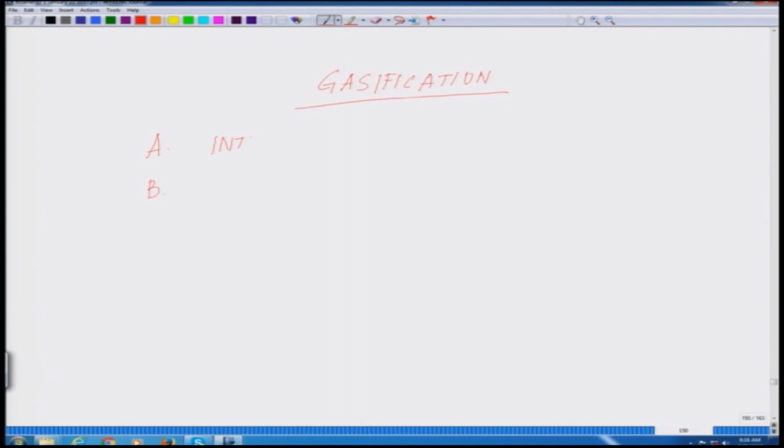First we will introduce what is meant by gasification, the whole process. Then we will talk about the basic chemistry. It is very essential that we understand the chemistry first. Without understanding the chemistry, nothing will make sense, that's why it is different from combustion and other processes like pyrolysis.

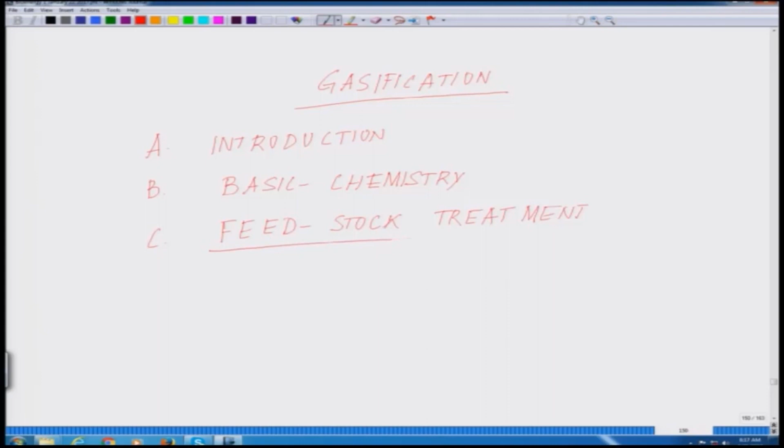Then comes feedstock treatment. This will take you back to the earlier lectures where we talked about what kind of treatments have to be done, what are the properties of the feedstock. Before you put something in a gasifier, or the whole assembly in which you are converting biomass to gas, you need to do some form of pre-processing of that biomass, or the feedstock - basically a biomass pre-treatment or biomass treatment, whichever we call it.

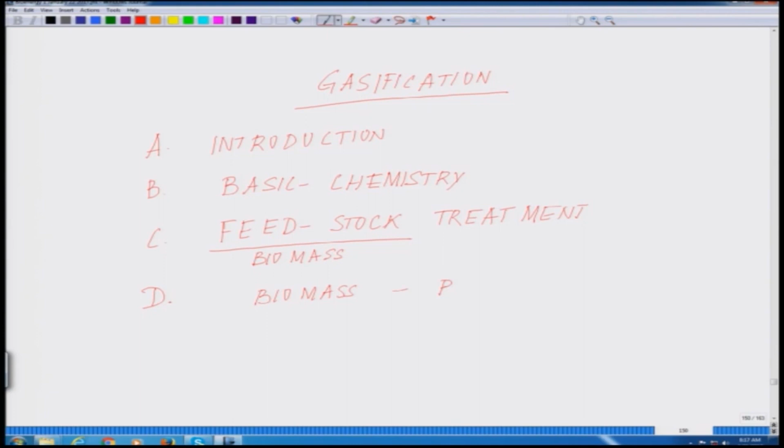Next, we will talk about gasification types, the different methods by which gasification is done. Under gasification types, the basic aspects of the chemistry will be the same, but different designs of gasifiers and everything will be discussed. Then, in conclusion, after these 5 aspects, we will do a summary of the whole thing we have covered. So this is the blueprint or the part of the notes we will be following today.

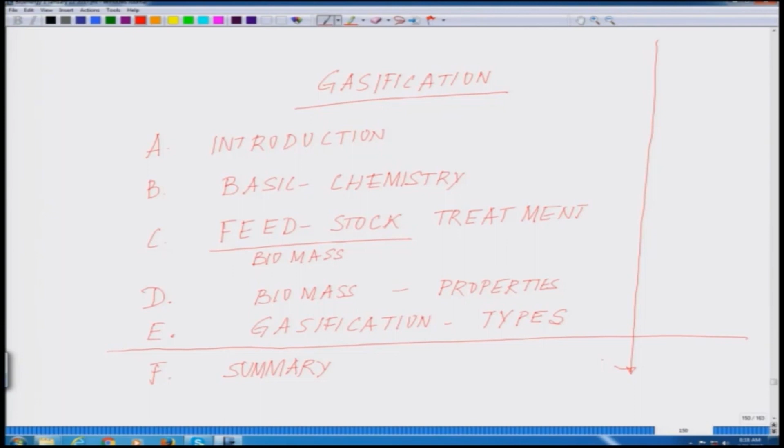So now talking about the introduction - what is gasification by definition? Gasification is a process of conversion of biomass into a combustible gas mixture. We will talk about what that gas mixture consists of. This is the basic process.

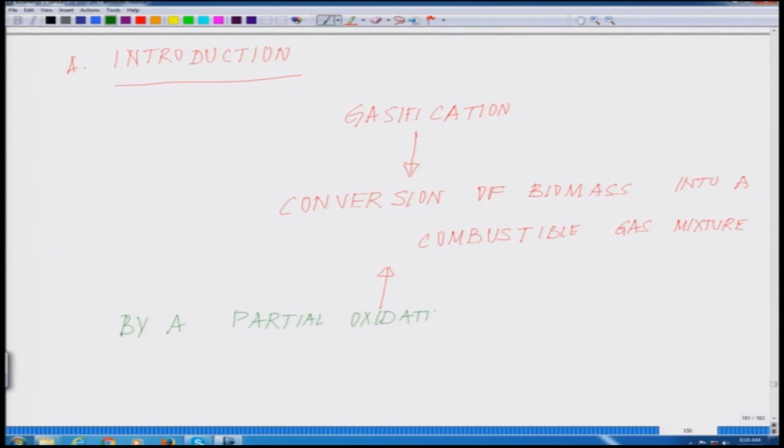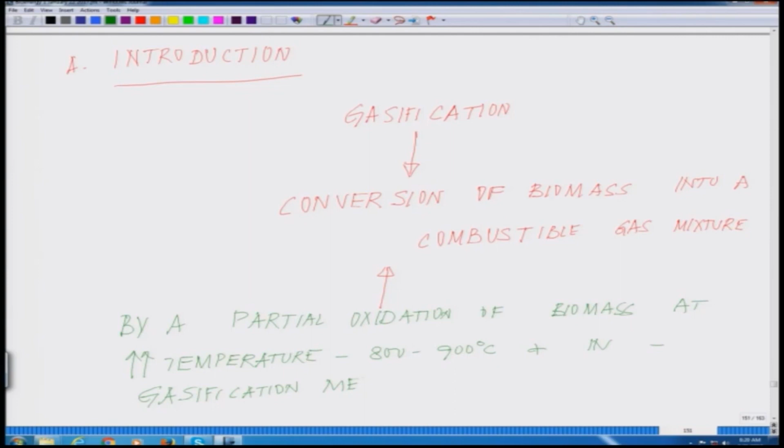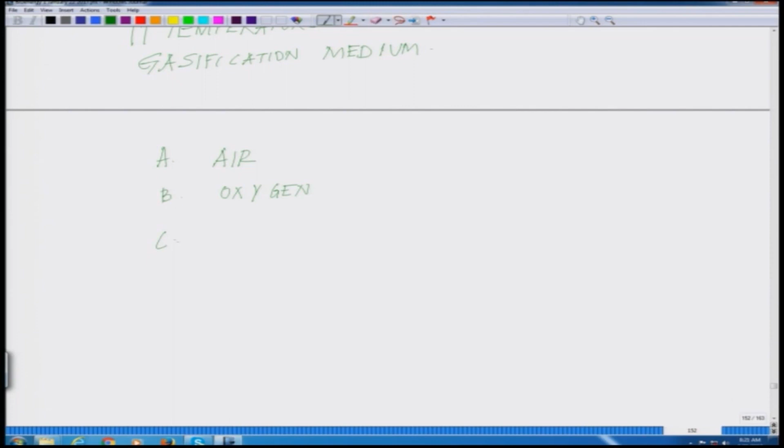How do we do so? The process which is followed is by partial oxidation of biomass at very high temperature, which is around 800 to 900 degrees centigrade, approximately, and in a gasification medium. What is the gasification medium? The gasification medium consists of either air, oxygen, steam, and there are a few more which we will talk about later.

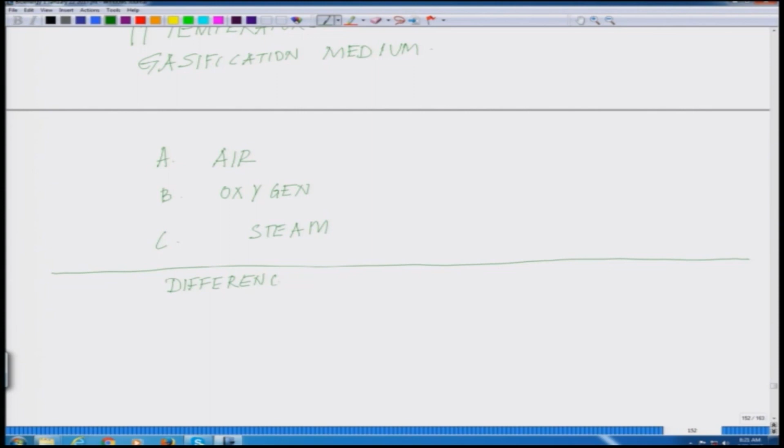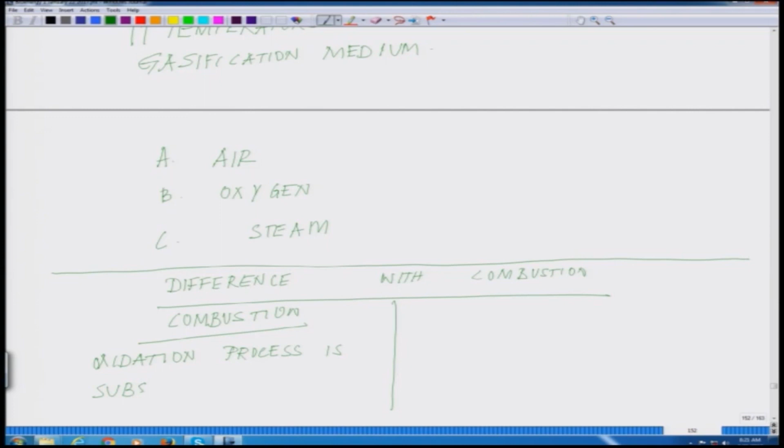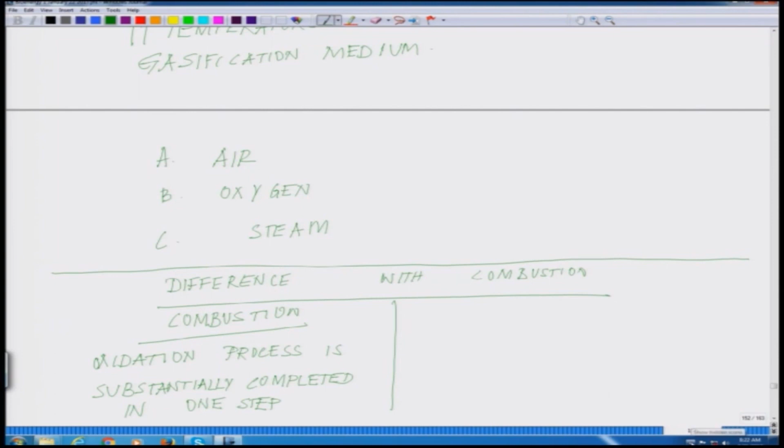Now, if we talk about the basic difference with combustion - let's do a one step comparison. Combustion is a process which is substantially an oxidation process where you are burning biomass, and this oxidation process is substantially completed in one step. Remember this, it is completed in a single step process.

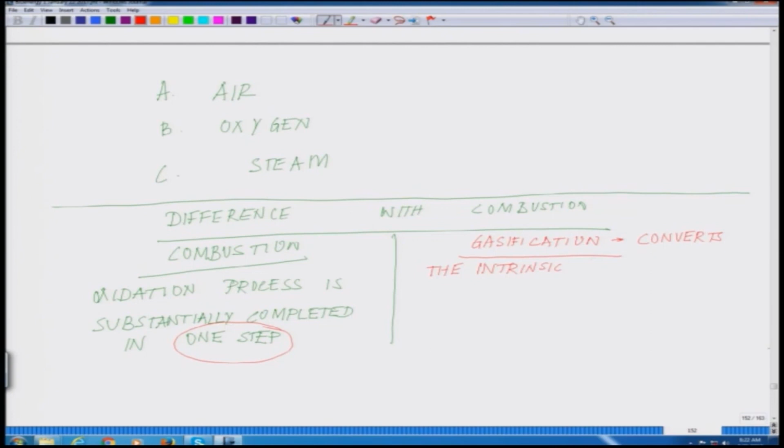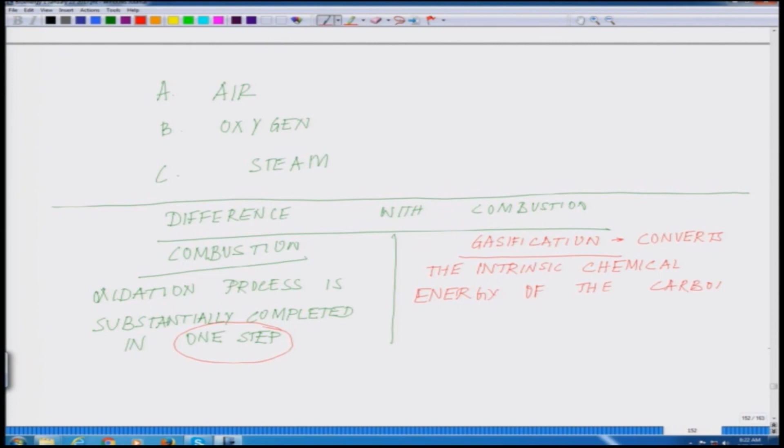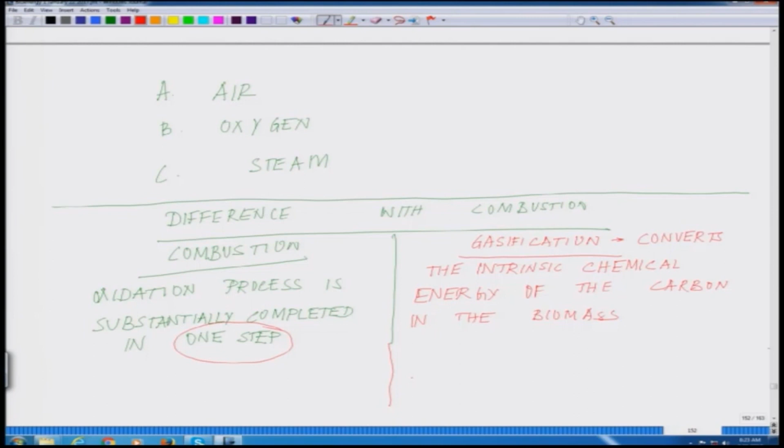Whereas if we talk about the gasification process, gasification converts the intrinsic chemical energy of the carbon in the biomass - if you remember, this is what I highlighted earlier - into a combustible gas in two stages.

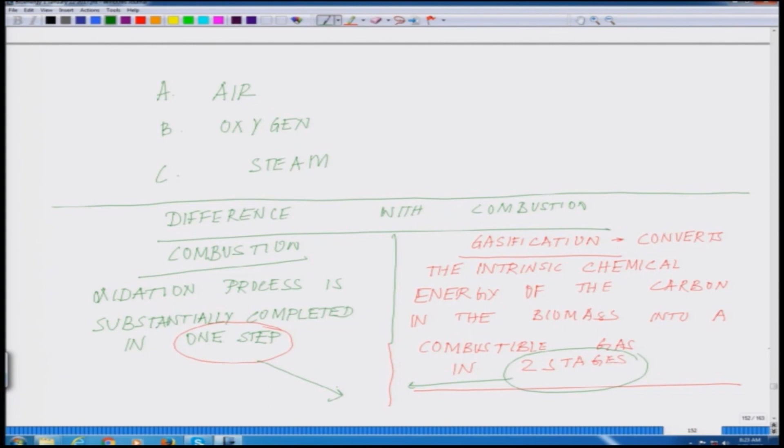Okay, so this is the basic difference. This is where the basic difference comes in. So what are those two steps? Our next goal will be to understand the two fundamental steps which differentiate basic combustion from the gasification process. Let us talk about the two basic steps.

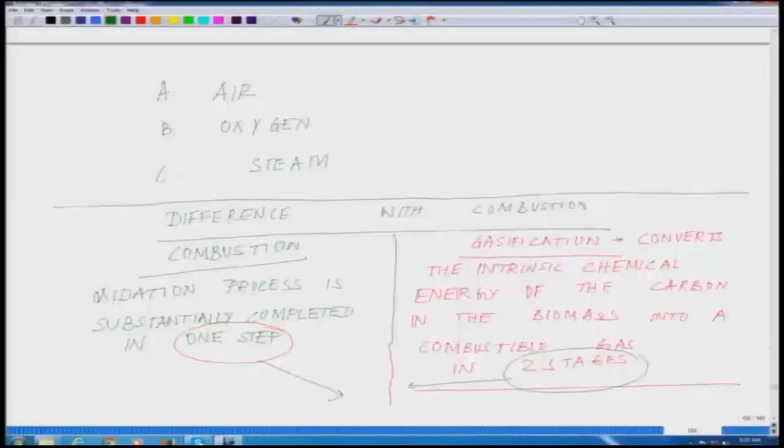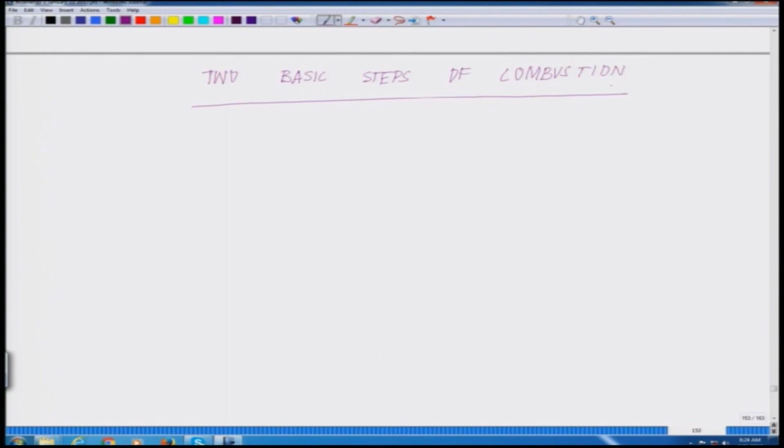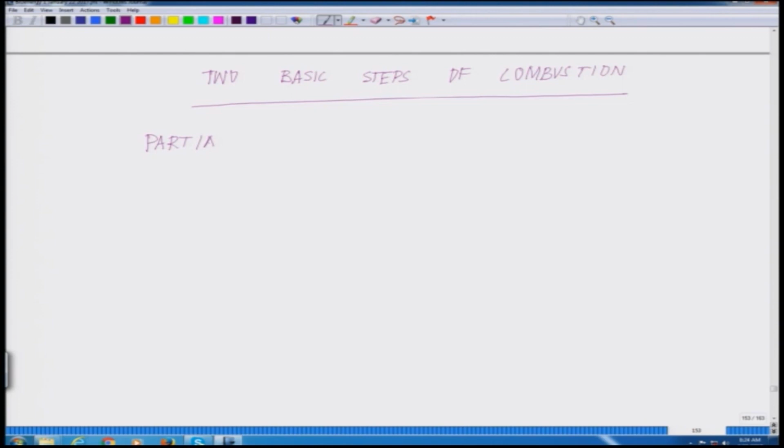Two basic steps of combustion. So step 1, we will have a partial oxidation step. This is step 1.

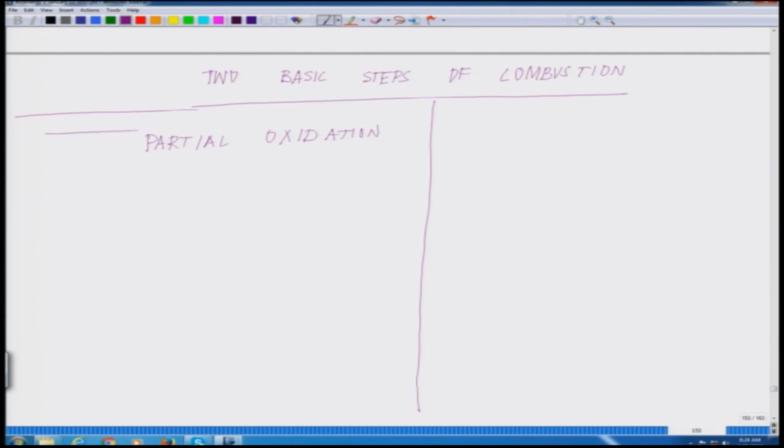So, let us do it in two tables. This is our stage 1 and this is our stage 2.

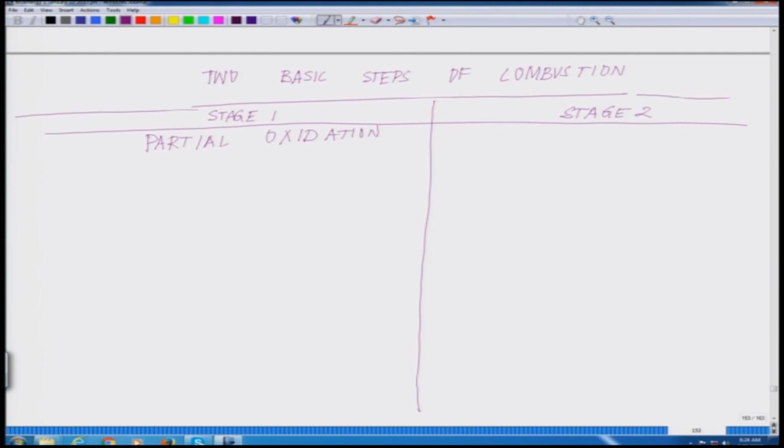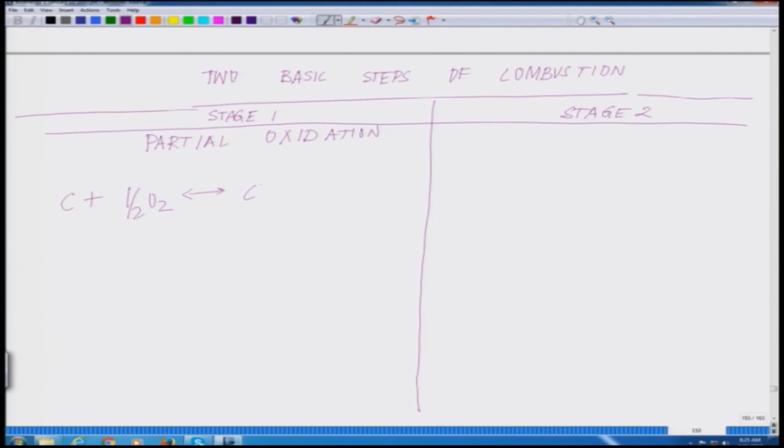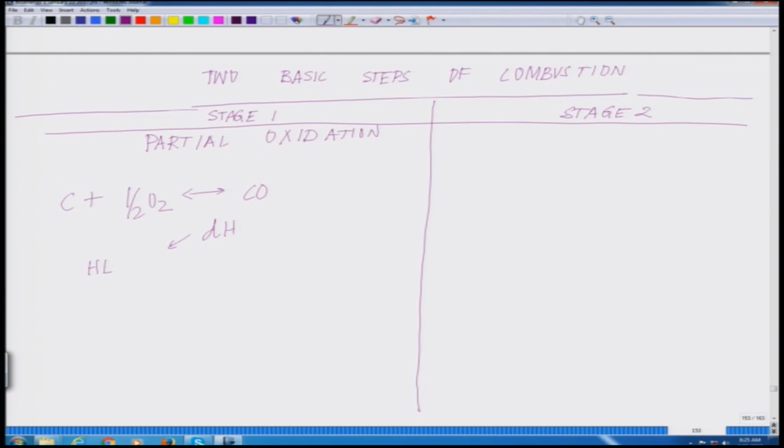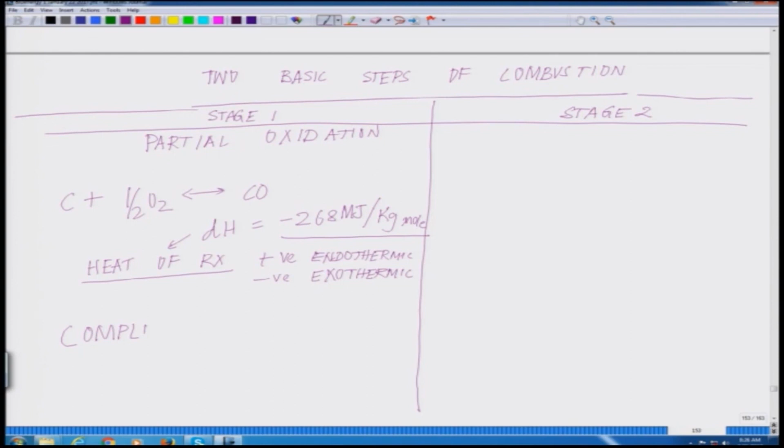Now, if the same carbon goes through complete oxidation, C plus O2 making CO2, and if you compare the heat of reaction or the DH value, that will be around minus 406 megajoule per kilogram mole.

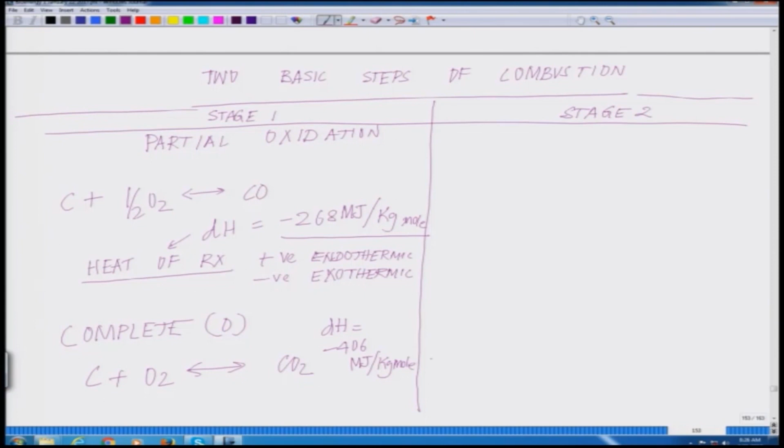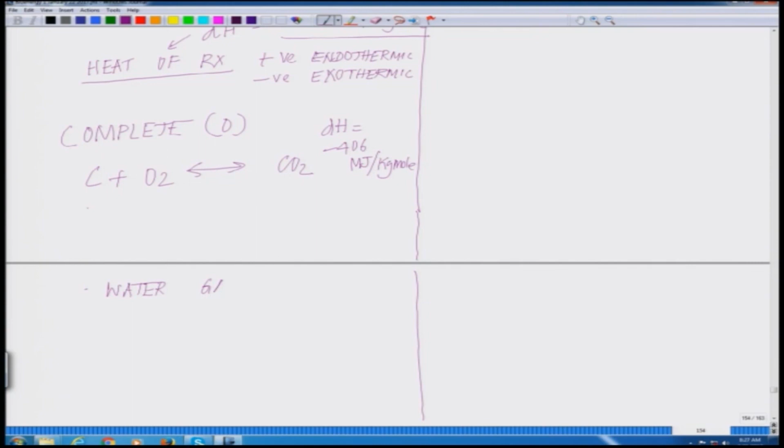So if you compare the three reactions, in the presence of the water gas reaction, the reaction becomes completely endothermic, absorbing heat energy, whereas the other two reactions are exothermic. Among all these, the biggest exothermic reaction is the one at minus 406 megajoule per kilogram mole.

Now if you compare these two values, 268 and 406, it will be around 65% of it. So the conclusion you're drawing from stage 1 is...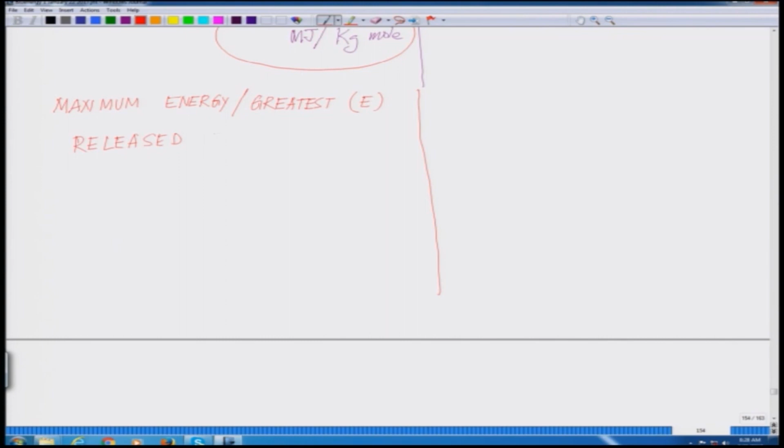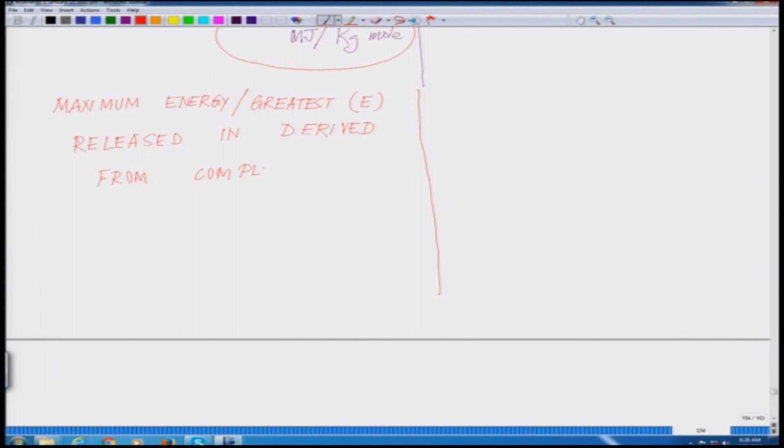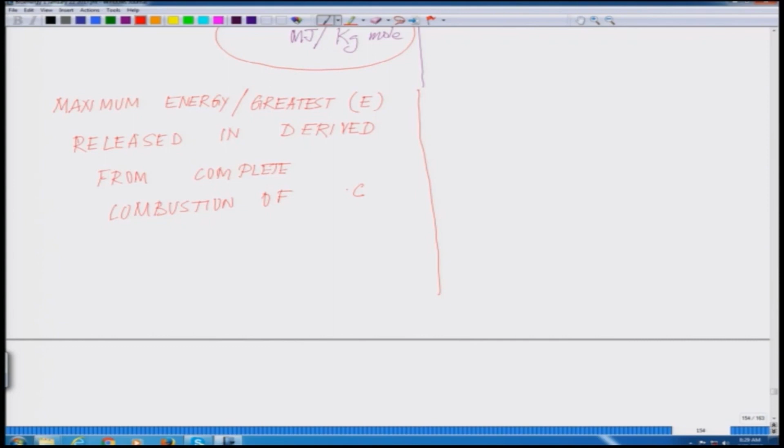The maximum, or greatest, energy released is derived from complete combustion of carbon, and you can compare the values. In the case of incomplete combustion, you have minus 268, and in the case of complete combustion, it's 406. I'm not putting the units here, but for your comparison, you can see the advantage is approximately 65%.

Now this is stage 1, where you see the products you are getting: carbon monoxide, carbon dioxide, and hydrogen, as well as a lot of high temperature steam present there. So you have 4 different kinds of mixture present there. But then what happens in stage 2?

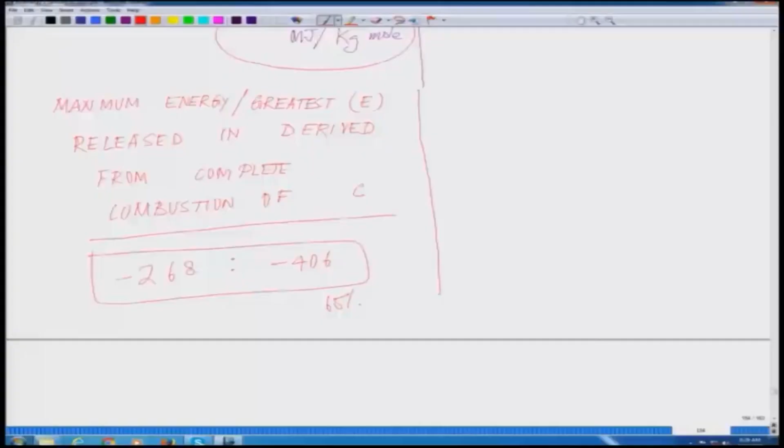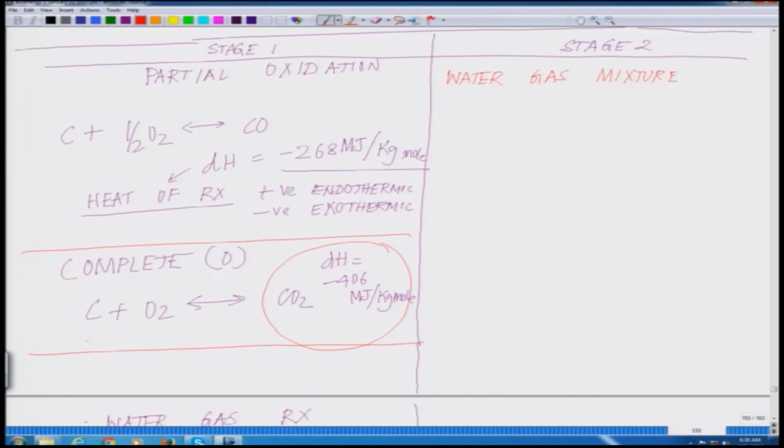Now we will come to stage 2 of gasification. Let us go back to where we were, now we are in stage 2. In stage 2, what happens is this water gas mixture shift reaction. What does that mean?

So that essentially means you have CO plus water, this becomes either CO2 plus H2, and the heat of reaction for this is minus 42 megajoule per kilogram mole.

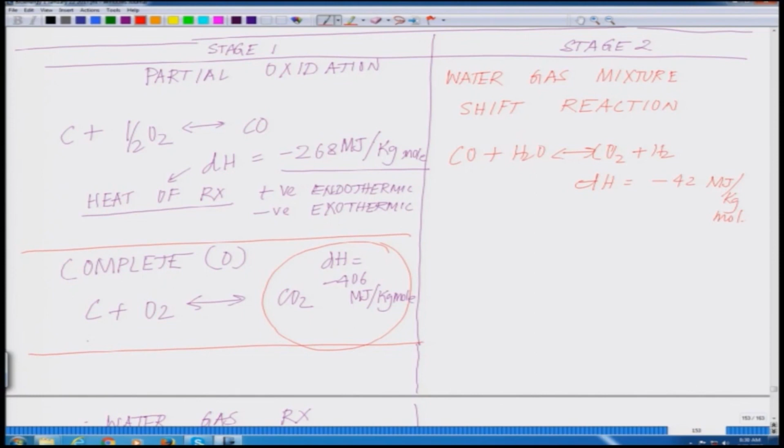Whereas in another reaction, what you get is the formation of methane, where you have CO plus 3H2. You're seeing a lot of hydrogen being generated. It makes CH4 plus H2O. The heat of reaction here is minus 88 megajoule per kilogram mole, and what you're producing in the second step is methane.

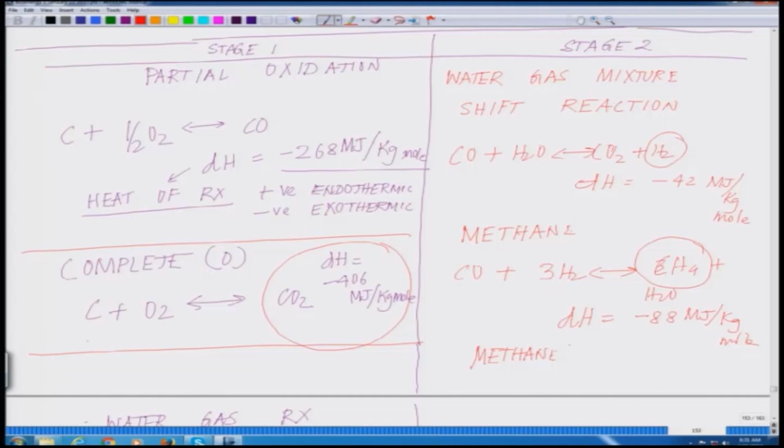Every time you're observing the arrow like this, it basically shows that the reactions are in equilibrium and can proceed in either direction. This is your control point for a reactor, and it can proceed in either direction depending on temperature, pressure, and concentration of reacting species.

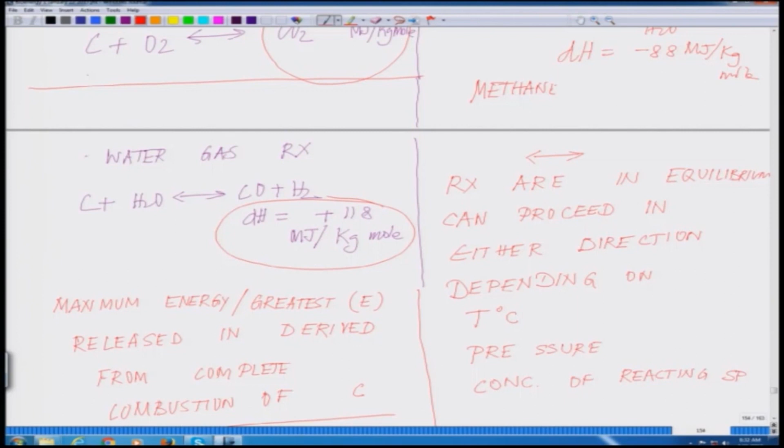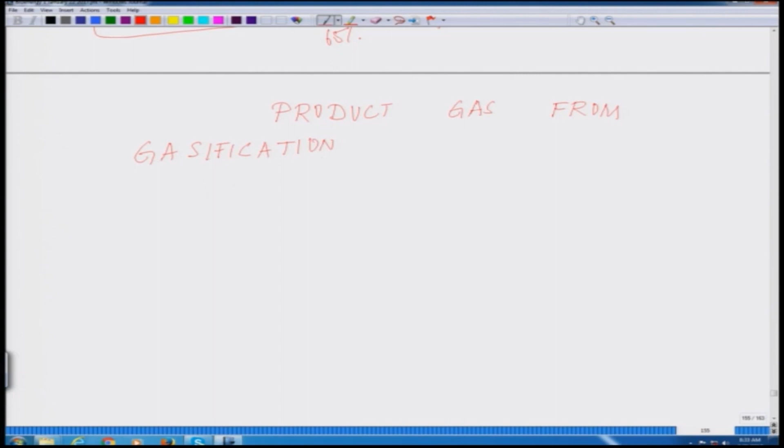And the product gas you get out of this whole process, what we call the product gas, is a mixture of CO plus CO2 plus methane plus hydrogen plus steam or water vapor.

This is a complex mixture obtained from this whole process, and unlike combustion, which produces only hot gas, in gasification what you are getting is a complete mix of these different things in the gasifier. So the amount of product is totally different.

What are the advantages of such things? If you look at the advantages of this gasification process, the gas produced can be standardized. I will close it here. Thank you.